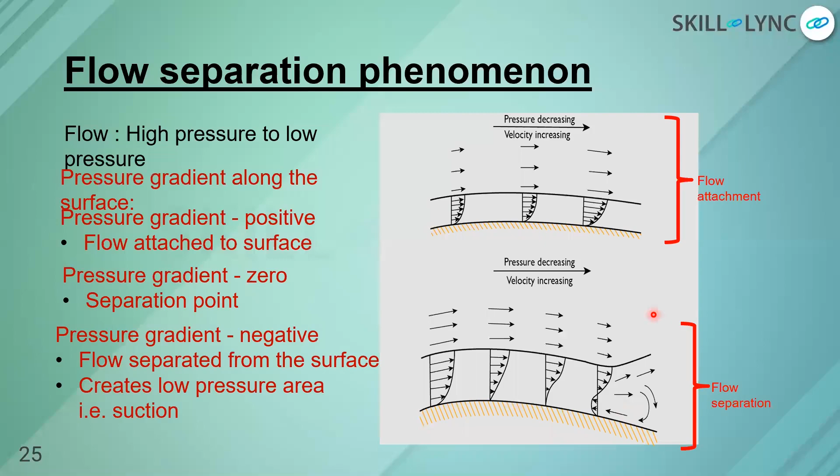So in this case, we have seen how the flow will be attached to the surface. It will not leave the surface. And in this case, the flow will start leaving the surface. So if we see the D point, which is near the surface, and C point, which is just above the surface, and the B point, which is somewhere here near the boundary, and A is the free stream over here. So we can see at the C point flow retardation is happening, and at the B point the flow is accelerating, because it has to follow the conservation law.

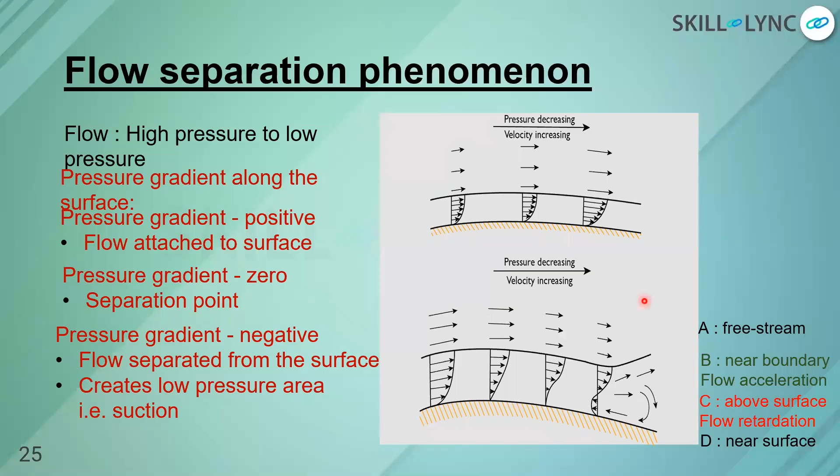In fact, Bernoulli's principle is not applicable when the flow separation is happening. So that's how the flow separation happens, because of the viscosity, because of the no slip condition, because of the change in the pressure. So let's see an example of how the flow separation happens, and how it is important in the industry or in reality.

Now here we have a wing airfoil, and by changing the angle of attack, we can see the flow separation, or the flow disturbance, happening on the rear side. Now in this case the flow separation is not happening. Now when we are changing the angle of attack, we can see at this area the flow is not attached at all. Now let me pause the video, sorry. Let me pause the video.

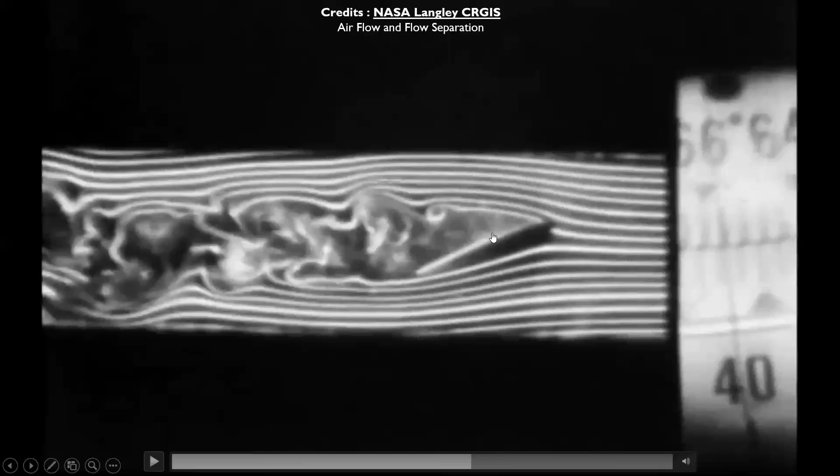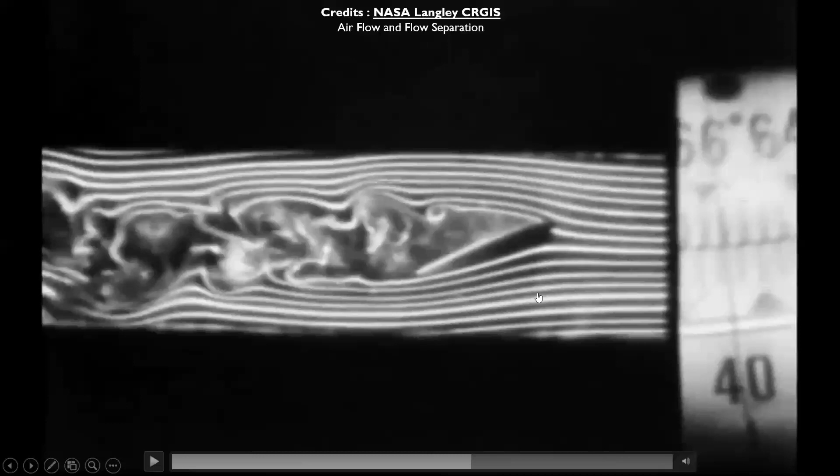Yeah, so we can see at these places the flow is attached. The flow is attached to the surface, and on the top the flow is attached to the surface. But at this area, the flow is not at all attached. That's called the flow separation from the body. And you can see the effect of flow separation, that it is creating a lot of disturbance in the flow, where we can see it is not at all stable. It is changing drastically. So let's see once more.

So we have seen how the flow separation happens when the flow is not attached to the body. But flow separation can create a lot of issues. We have seen when the airfoil was at 0 degree angle of attack, the flow was pretty much smooth. The downstream flow was very smooth, in fact. But as the angle of attack was changing, we were seeing there is a huge disturbance on the

backside of the airfoil. Now, one thing is, if any object is behind that airfoil, in the case where the airfoil has a 0-degree angle of attack, that object which is behind it might not have that much effect.

So let's try to see an example of an automobile and try to understand what is the effect of flow separation on that. So let's see, we have a car. I'm not going to explain the physics of this car, but I'll try to make you understand how flow separation is important in this car. So let's say it is running at very high speed, same as the airfoil.

So we will have a high pressure in the front of the car, stagnation pressure, because the car is moving, and the geometry of the vehicle is like that when the flow is interacting with the car, it will try to stop the car, restriction of the air. So here at the front of the car, the pressure will be maximum, and as the flow is moving along the car, the pressure will change, the velocity will change. Now I'm not telling whether it will be high or low, because I'm not interested in that.

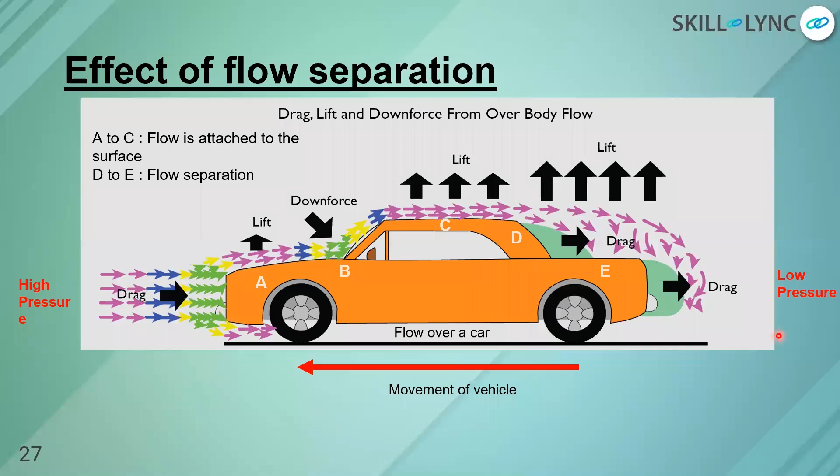The low pressure is one of the outcomes of the flow separation, but that's not my area of interest. Now, as per Bernoulli's equation, the flow should happen from high pressure to low pressure. You see there are two forces which are very much opposite. As per the principle, the flow should happen from high pressure to low pressure, so from left to right. But because the car is accelerating and burning fuel, it is creating the power, so the movement happens from right to left.

Now, when we calculate the drag force of the car, we include skin friction drag and form drag, which is called the pressure drag. This difference of pressure is going to play a major role. The more flow separation, the more low pressure area, and the more form drag or pressure drag. If we just consider the pressure at point A and at point E, the pressure at point A will always be higher.

What we can do is minimize the difference between A and E, because that is directly proportional to the fuel you're burning, and equally to the mileage or fuel economy of the car. Those things will depend on the fuel consumption, the vehicle design, which is more important, so the vehicle design should minimize flow separation, and of course the vehicle performance.

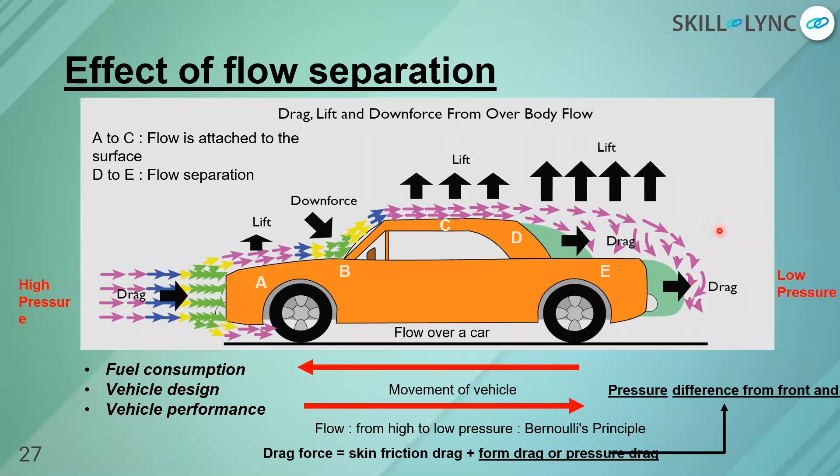So that's the reason why you see sometimes that even the sedans or the hatchbacks also, the rear windscreens are pretty much dirty if you go into a dusty place, if you go into places where the roads are not very clean, or if it is windy. That's one more thing, and that's the drawback of the flow separation of the car. It's not just the fuel consumption, but also the vehicle soiling. Okay, so that's one thing what we have seen.

Now next, let's talk about something which is called the type of flow, where we categorize. That's more important when you are trying to understand the computational simulation. Now all these things are still not related to any tool. All these things are related to the phenomena, to the physics. We haven't spoken about anything about the tool, neither ANSYS, Fluent, or anything. All what we are trying to understand is independent of tool, the physics and certain laws, or how we can understand first the fluid dynamics. Later on we can see the computational fluid dynamics.

Now I'm not going into the detail of what is laminar flow and turbulent flow, but in fact I'm more interested in what's inside the turbulent flow, how turbulent flow is very critical to handle. So I'm not talking much about the laminar flow. Laminar flow is very simple, that's low velocity flow, and the velocity vectors are quite parallel and stable, and that gives you pretty much stable results.

Now the most challenging part in computational fluid dynamics comes when you start dealing with turbulent flow. It's not like I'm saying laminar is less challenging. No, the expectations with laminar flows are well established, that this is the flow and that's how the result should be. And in a lot of experiments we have seen that we have a good correlation between the experimental and the computational domain. Now, the most complex part in the computational simulation comes when you are dealing with the turbulent flow.

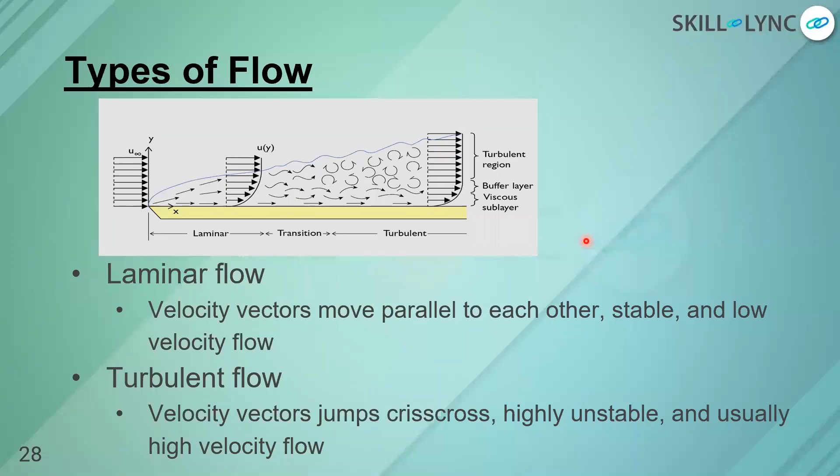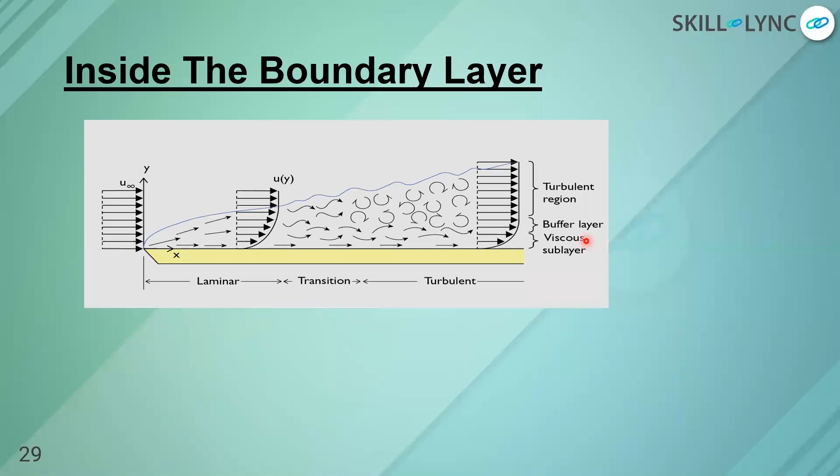Now, boundary layer. We have seen the boundary layer thickness. We have seen that it's the effect of the wall, or the effect of the roughness of the wall, up to which extent. So that's what is called the boundary layer thickness. So let's see what exactly is inside the boundary layer.

So in laminar boundary layer, we have a viscous layer, which is usually very much established, or you can say, in a disciplined fashion. But the turbulent boundary layer is divided into, as you are seeing now, the viscous sublayer, then a buffer layer, and a turbulent region. That's where all the physics, all the challenge, all the randomness, the physics change happens, and that's the place where the most challenging part occurs.

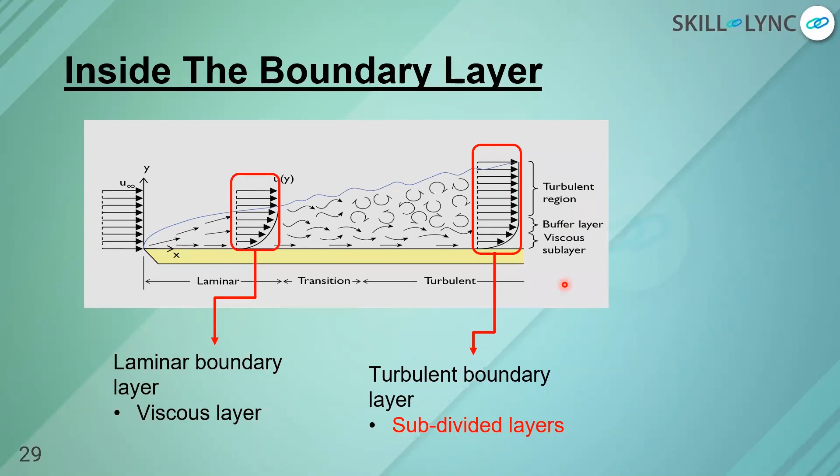Now let's see what exactly is inside the boundary layer. So if we have a wall over here, we then have a sublayer. I'm not much interested in what exactly the layer is called, but I'm trying to make you understand what exactly those layers are. Now, the fluid layer which is exactly on the wall, or very near to the wall, will have a laminar flow, because that's highly viscous flow, and the randomness will be very less. It will be very stable because it will stick to the surface. The reason behind that is it will have a maximum effect of the wall.

The wall will try to grab it, the wall will try to stop it, but because of the inertia, because of the difference in pressure, or because of the external force, the flow is moving over the wall. So here the inertia is still dominant because the fluid is able to move, but the viscous forces are dominant enough to slow it down. So that's the place where the fluctuation will be very low, and the flow will be pure laminar.

But that's the place where the shear stress would be the maximum, where the skin friction would be the maximum, where the interaction of the wall with the flow is maximum. Now, as we are moving away from the wall, there will be a region where we have a collaboration of the free stream, which is unaffected by the wall, and the effect of the wall. So it's kind of a mixed region.

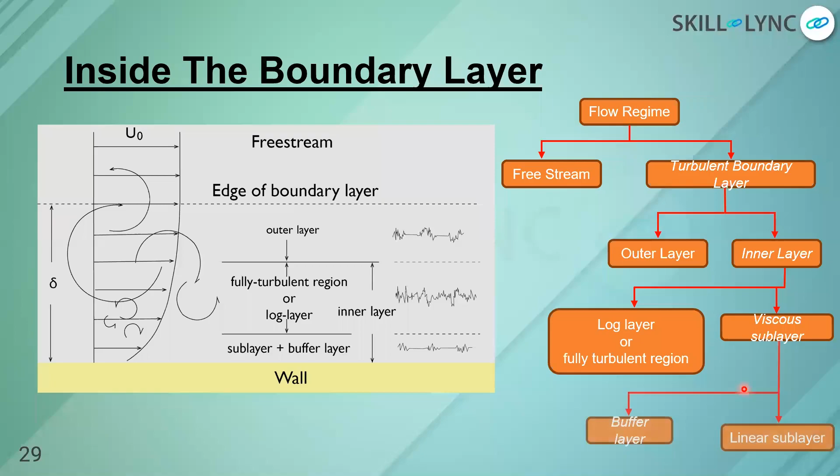So the flow regime: we have a free stream over here, and then we have a turbulent boundary layer, and then of course in the turbulent layer, again we are subdividing into all these categories. Now what's happening in fact in the turbulent boundary layer? I'm not going to read all the text.

The thing is, when we are doing the simulation, why do we need to understand all these layers or sublayers? Because when we are converting the real problem, the flow over a plate, the flow over a cylinder, the flow over a vehicle, we need to understand what kind of result we want. Remember pizza theory? What type of output you want means what type of flow region you want to resolve. Do you want to resolve this one, the log layer, the outer layer, or are you not at all interested in what's happening in the boundary layer?

Maybe I just want to see the free stream, how the interaction of fluid is happening, and I'm not at all interested in this. Now the thing is, every layer has its own significance and its correlation with the result. For example, if I want to calculate the drag coefficient of a vehicle, I will be interested in the sublayer and buffer layer. The question is why and how.

When you want to calculate the drag coefficient of a vehicle, you are interested in two things. One is pressure, the pressure drag or form drag. The second is skin friction drag. Skin friction drag is maximum at the wall, where the fluid interaction is happening with the surface, because that's the place where the friction, the viscosity and the shear stress will be high. Most important part.

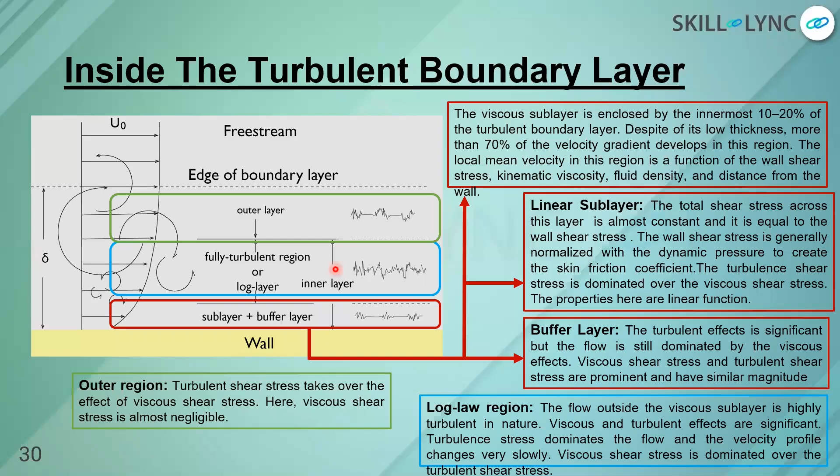That's the key point: you need to understand all these layers properly. If you want the drag coefficient of the vehicle and you're solving for the free stream, you're not going to get the correct drag coefficient. Second thing, the meshing. Let me go to the next slide. There is a parameter called y plus. I'm not going to explain y plus, but y plus is directly related to the mesh resolution and the flow regions.

So you can see over here the input parameters. Y plus is something you do hand calculations for, to get a value which is directly related to the Reynolds number. I have a slide showing the CFD process where y plus is important. If you're not aware of y plus, understand that there is one parameter called y plus when you are dealing with turbulent flow. And when I say turbulent flow, you should get the idea that turbulent flow has all these regions, and I need to know what I am solving.

So there is a parameter which has some limitations and categories: if it is in this range, I am concentrating on this region; if it is in a different range, I am concentrating on another. All these parameters are directly related to the meshing. The grid I am showing here is a structured mesh. Near the wall you have a fine mesh, and away from the wall we have a coarse mesh.

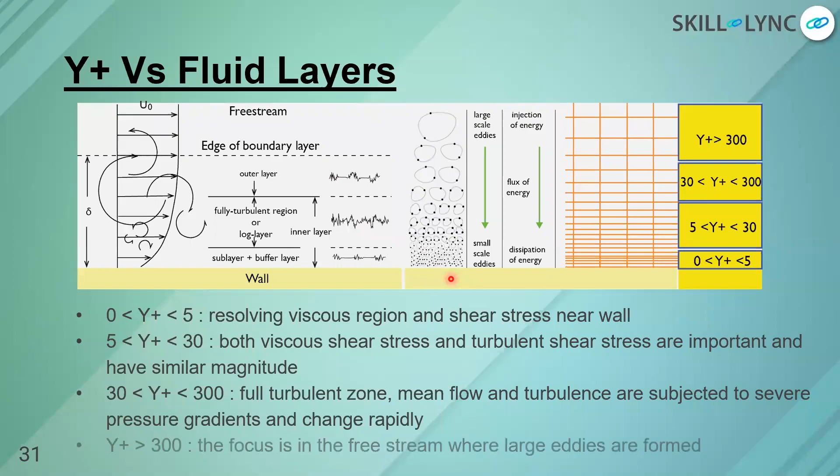It could be the heat transfer also. The heat transfer is important because that's where the heat transfer will be maximum - that's one advantage of understanding boundary layer theory. This is the place when you are mixing the flow with thermal simulation, because that's where the fluid and solid interaction happens, where the interface of solid and fluid is, so that's where the maximum heat transfer from one phase to another will be important.

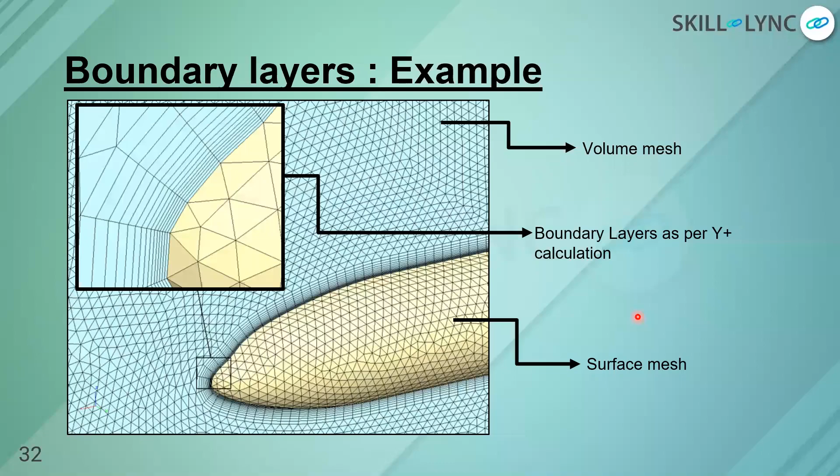So this is an example where just by seeing the boundary layers or the mesh, you can understand what type of physics we are interested in. In a lot of interviews or exams, I can give you a screenshot like this and ask what type of physics are expected - options like drag coefficient of the body, flow patterns, and so on. To understand that, we have to have an understanding of the boundary layer theory.

Now, pre-processing is something I was talking about, and I said it's not straightforward - it's not just meshing, that's really true. The pre-processing part is related to geometry preparation, and geometry preparation doesn't mean just working on the CAD tool. The first thing is you try to understand what the aim of the study is.

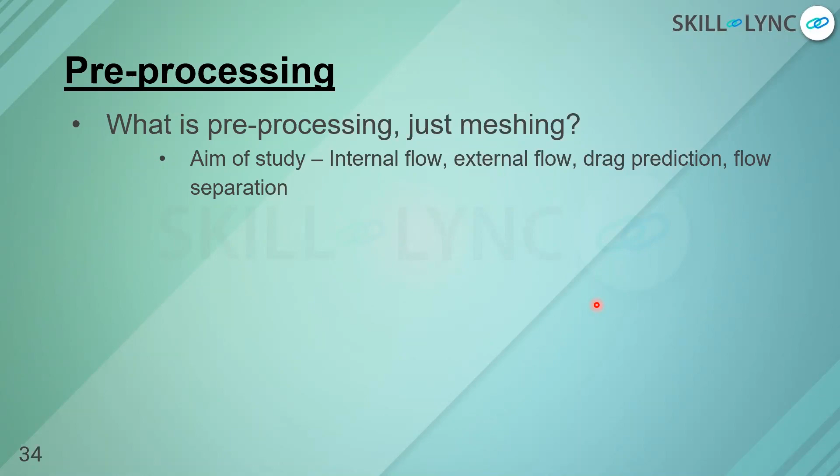Is it a pipe flow, meaning internal flow? Is it an external flow - drag prediction, flow separation? What exactly are you looking for? That's a part of pre-processing, that's an understanding of pre-processing. Now, what kind of physics is involved?

Are you interested in the drag coefficient of a vehicle? Are you interested in conjugate heat transfer modeling? This is why I keep saying pre-processing involves all these things, because you will understand which type of physics are involved.

For example, on the basis of that, if I say what type of physics is involved - say I want to do a conjugate heat transfer, or simply I want to see the heat transfer of a solid block into the fluid, with some external source of air cooling it. In total, it makes a forced convection where we have a heated block, or a block which has a high temperature. The important thing is, what do you understand from those parameters or from the physics?

Second, once you understand the physics, write down all the important parameters involved - that means the temperature difference. When there is a block, there is a solid, there is some material, there is conduction heat transfer, convection heat transfer. So the first thing is to understand all the important parameters involved, so that during simulation you don't miss any of them. If heat transfer is involved, if a solid is involved, what is the material?

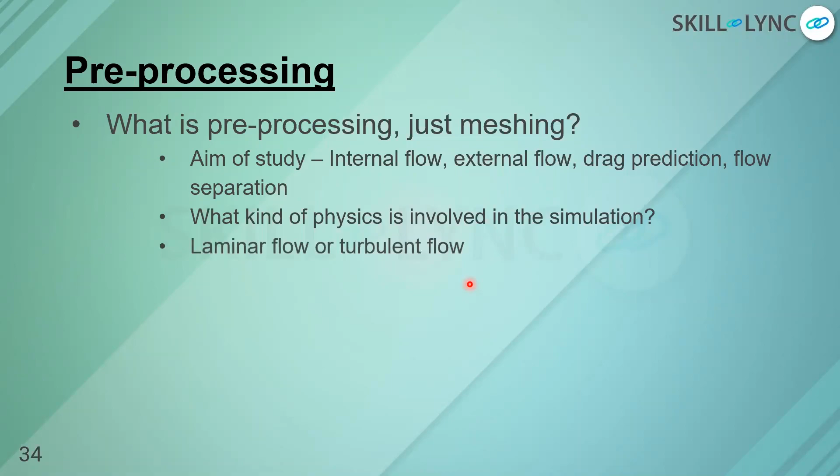Then, of course, you need to understand if the flow is laminar or turbulent, with appropriate hand calculation. Try to understand what a Reynolds number is. Reynolds number will give you understanding of whether it's a laminar or turbulent flow. If it's a turbulent flow, what is the y plus value, where you are interested, what is the physics you want to resolve or solve. So those are the parameters, that's the place.

Till this place, it is independent of any tool. This makes understanding how much you understood the problem.

Lot of places or lot of interviews, they don't ask anything if you're expert in Fluent. No, I'm not at all interested if you're good into the tool and all. Tool is a way where you can set up the problem, but only thing is, how will you know all the important parameters? How will you know which physics is important? How will you know which areas I need to focus on, which is the sensitive area?

If you're solving a problem related to conduction, and you're not considering the heat transfer, the conductivity, heat transfer coefficient, so convective heat transfer coefficient, then you might not have a good understanding of the physics. So that's the reason, till here I would say, you need to understand the physics first. Tool comes later, because tool is something where you're going to enable you, where you're going to put all these parameters. Now from here it starts.

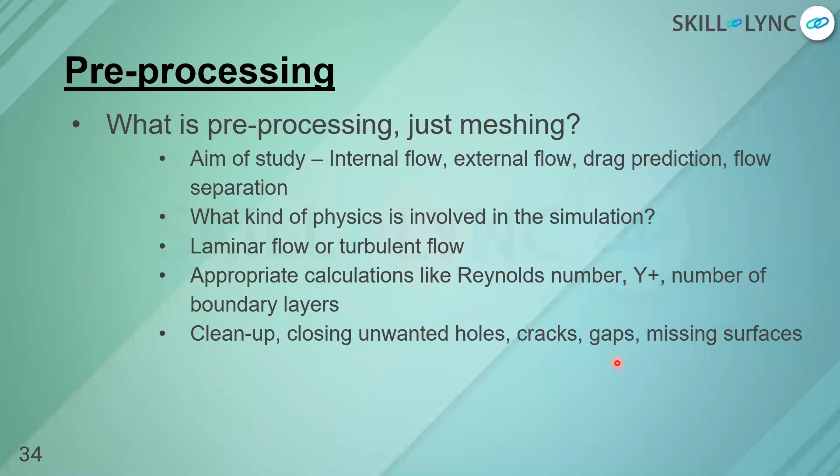Okay, clean up the CAD, close unwanted holes, cracks, gaps, missing surface, all these things, domain definition, all these things are related to capturing the geometry precisely. Those things are related to the tools, which is what you can say is a part of pre-processing, but that's after understanding the physics.

Now in the pre-processing also, something which is related to the mesh. We are not going into the detail of meshing, because that's totally different, in fact a big area. But the important part is how you're going to choose the right element size, which is also related to the physics. If you need to understand the size of element, it should not be random. There is a logic behind how you're choosing the size of element to do the meshing.

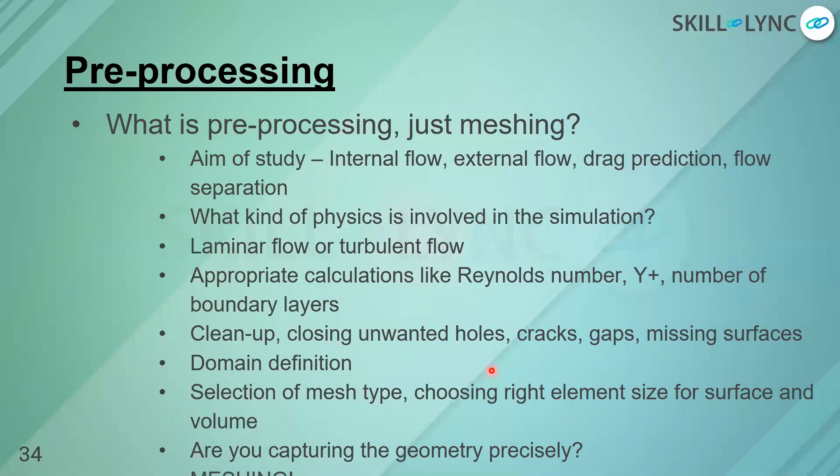Now let's take an example, I'll give you a background of why meshing is important. In fact I will not say meshing, I will try to show a process. I will try to make you understand what exactly happens in computational fluid dynamics, or exactly how the flow problems are solved.

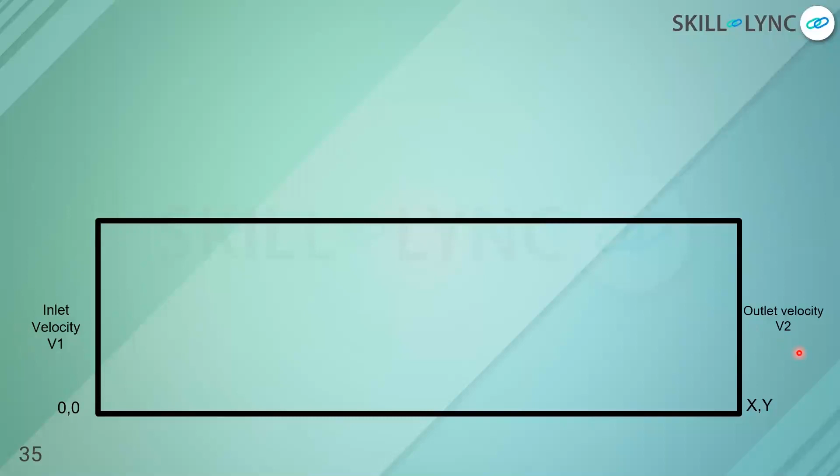So let's see, let's say if I have a domain which has a certain dimension. I'm not at all interested in what the dimension is, it has some finite dimensions. So I have an inlet velocity v1 and outlet velocity v2. Bernoulli's principle says, of course, the velocity v1 will be lower than velocity v2. Now I have a point A in the domain. I have velocity v1 at the inlet and velocity v2 at the outlet.

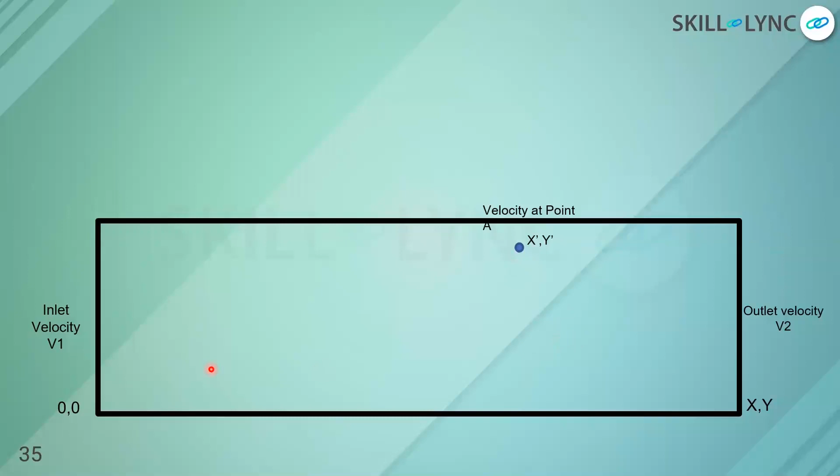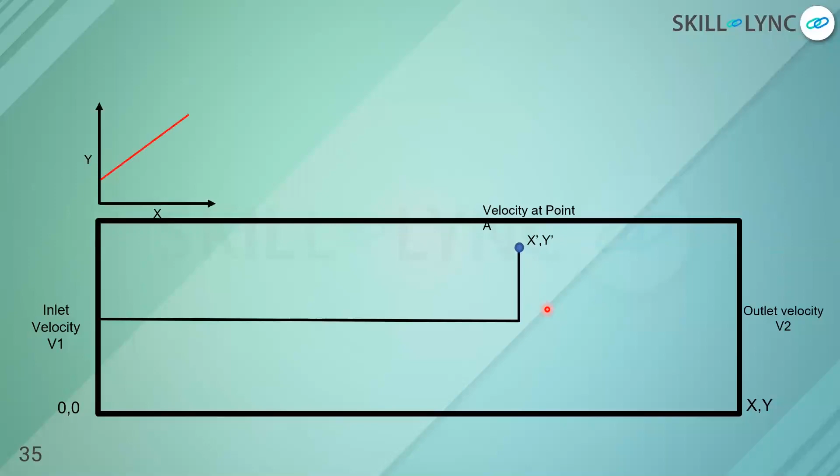So if I want to calculate, or understand what is the velocity at point A, of course this is a constant velocity, the velocity variation is constant, there is no disturbance in that. So I would say somehow I will get a result something like this at this point, maybe, I don't know, but I would say it's linear. I'm not interested whether it's different or not, but I would say at this point, from the initial at 0 to at L, where v2 will be higher. So at this point, the velocity at point A, in this situation, the velocity at point A would be linear.

Now the thing is, here we are able to understand, or we are able to do a hand calculation of velocity at point A easily. What we can do is, we can simply calculate with some correlation, with some formula. With any formula we can understand what exactly the velocity at point A is.

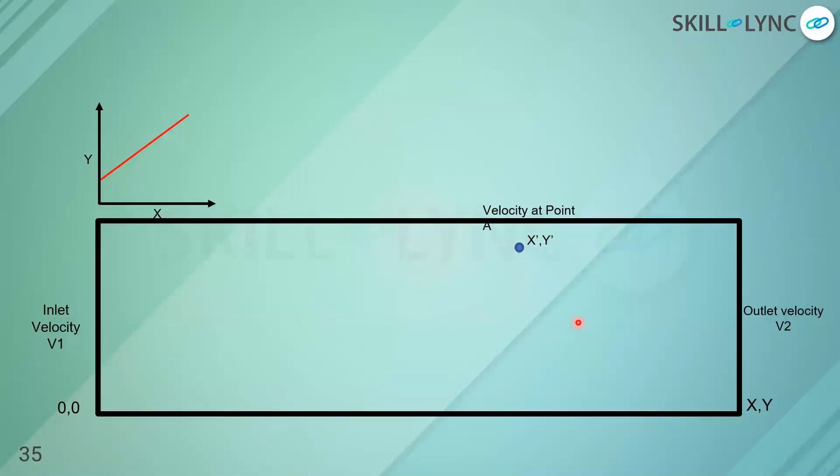But what if I insert the object in this domain, and now I want to study the difference in velocity at point A. Now what will happen is, the flow is hitting this area, so this object will create a velocity disturbance here, and it will not be linear at all.

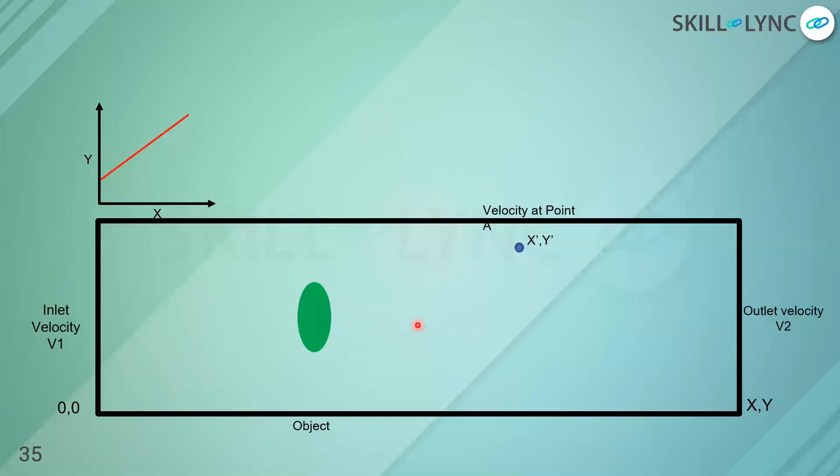That's one thing I can be sure of, because the velocity vectors at this place will not be linear, since the flow is hitting here and there will be flow disturbance behind the object. Now if I want to understand the velocity at point A, I need to calculate the velocities at points somewhere around, near these points, and then I'll be able to understand how much velocity is at point A when the object is inserted.

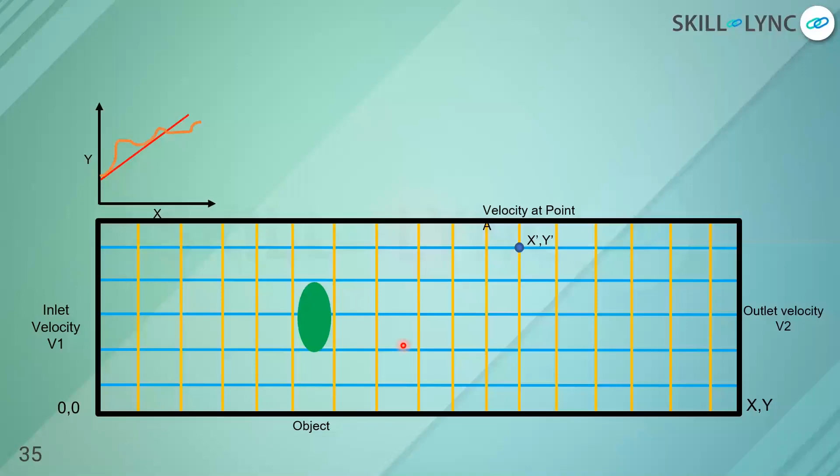In that case, maybe the velocity will come out like this. So you're not sure, because of the disturbance, how much the velocity is varying, whether it will be linear or not.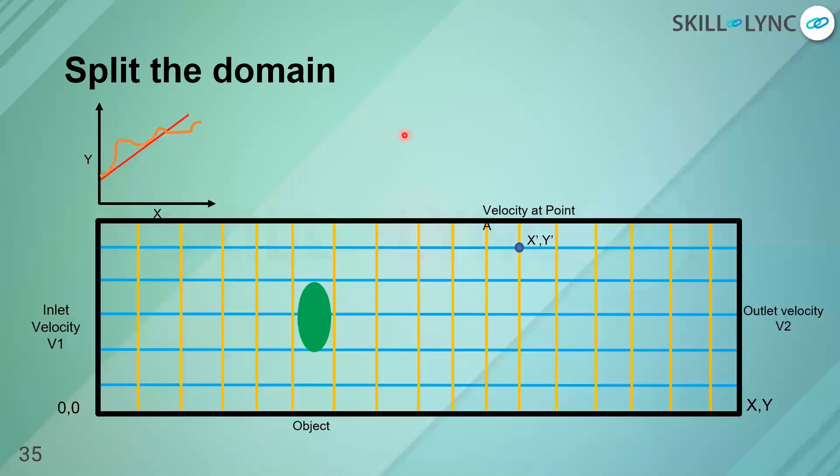Now what I did to get the velocity at point A, I split the domain. In technical terms, I discretize the domain, where we have a finite distance in the x and y direction. Now this is a finite, very small domain, so if I want to do hand calculations, I can. But what if this domain is really large? If it's really big, hand calculations are not at all possible.

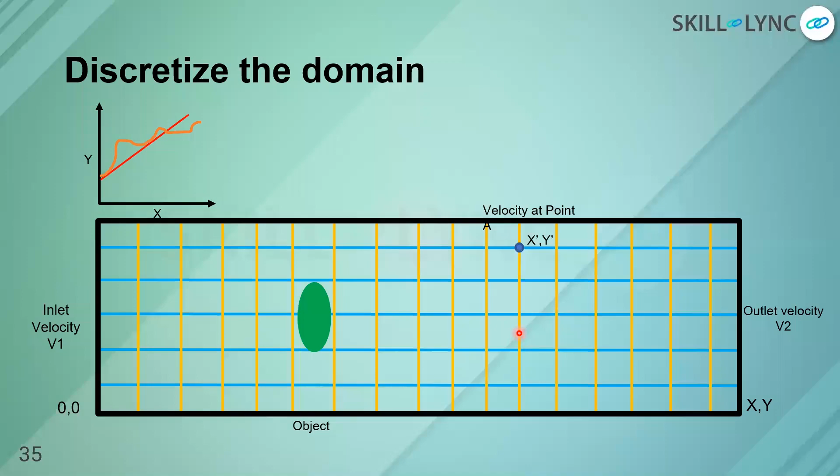So in computational dynamics, or computational fluid dynamics, we split the domain the same way, and the reason for splitting is the same: to get the velocity or any physical quantity, like flow velocity or pressure variation, at some point. So that's the background of meshing, that's the reason of meshing.

Now I did structured meshing, there are variations in meshing which we're not interested in here, but that's the reason of splitting the domain. If I want the velocity at different points, say at the middle of this square or rectangle, I need to split this further, so that the point lies on a node. That's the reason we need to do meshing, and that's the background of splitting the domain.

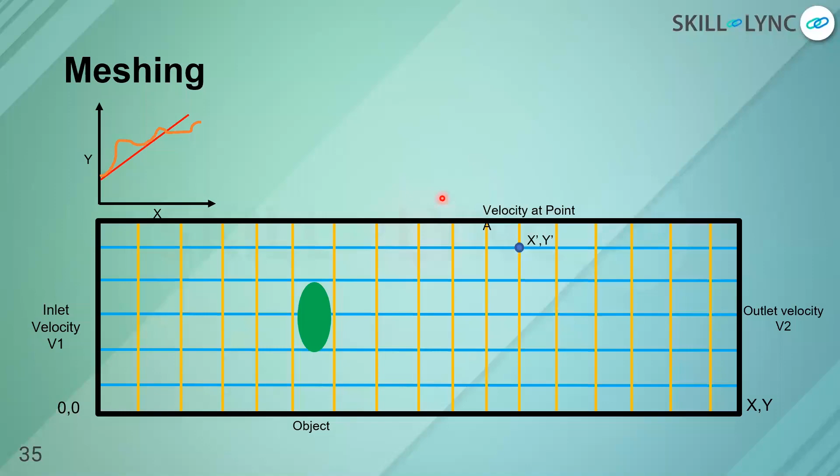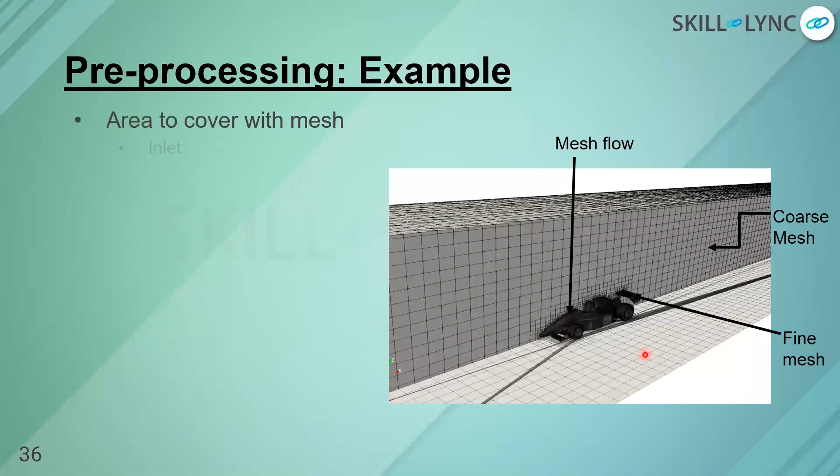Now let's take an example where we have a car, and meshing has been done on this car. The important thing during meshing is capturing all the inputs in the domain precisely, because computational fluid dynamics is simulating a body, or doing a virtual test of a finite domain.

We have to have a mesh in a finite domain, we cannot have a mesh in an infinite domain. We have to have boundaries in which we are simulating, so we define conditions like the inlet, outlet, and sidewall. That's basically the boundary conditions.

But the important part is how well we are capturing the body, that's the area of interest, not this part, not here, not here. That's the area of interest. How we capture that, and how the mesh transition happens, comes into the meshing techniques. But that's how a mesh looks like when you're going to solve a problem.

The most important parameter of pre-processing in meshing is, are you able to capture the geometry properly? Capturing geometry properly doesn't just mean capturing all the edges and curvature. It means, are you able to retain the geometry as it is after meshing, like the CAD? Any distortion or variation in the CAD happening after meshing should not happen, it should never happen.

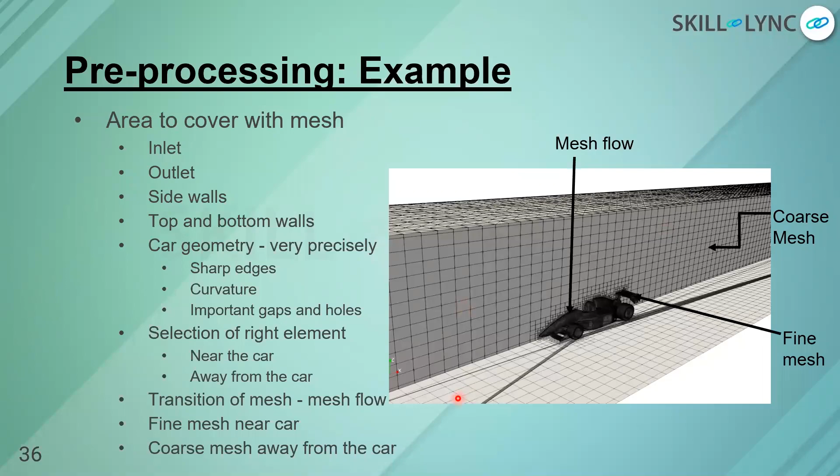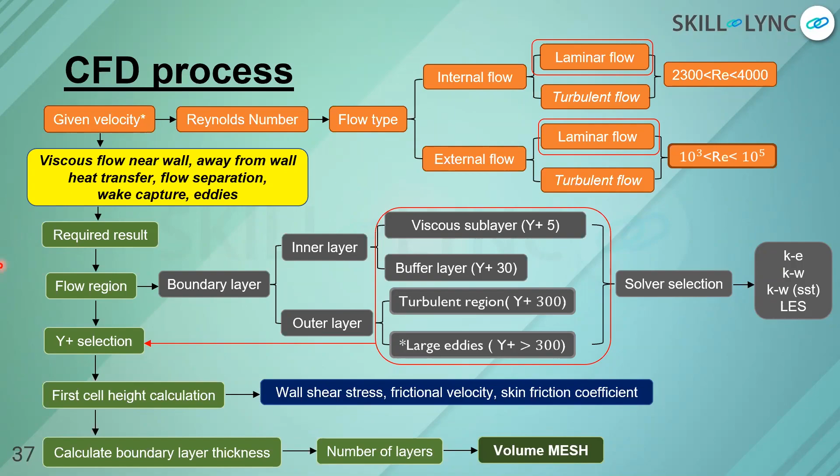The process is, what is the input you got, and what are the outputs you need based on that. So you need to do some calculation, you need to have some assumptions, you need to calculate some properties. So that's how I tried to summarize the CFD process. With this you are good to go, but still each and every block you should be able to understand properly. Now, what we talked about CFD was the background. The important part is how we are going to utilize the skills of our understanding towards computational fluid dynamics. Now here, I have one more slide for the result discussion, so let's talk about the results.

This is the simulation of the u velocity magnitude, which has been cut at the center of the body. Now you see all the cursors, they are indicating the flow under the body. We have sedan 1, sedan 2, and then a performance car, which you can say is a sports car. And then we have an SUV, and then a truck. Now one thing we see is the geometry variations past the B pillar; the back geometry of these cars is different. So of course we can expect a change in the flow behavior. The second thing is the ground clearance. The SUV and crew cab truck have a high ground clearance, and we see how this velocity variation is happening.

Now the significance of these results, or how we are going to use them. The underbody flow in the automobile is very important, for two reasons. One is the drag coefficient, because in the underbody of automobiles all the parts are exposed to the air, and they are very irregular in shape. The axle is open, the suspension, the exhaust is there. But again, are you trying to understand the flow physics, or the heat transfer? Because if there is exhaust geometry on the body, there's heat transfer. Do you want to cool down those parts, or are you only interested in the aero part?

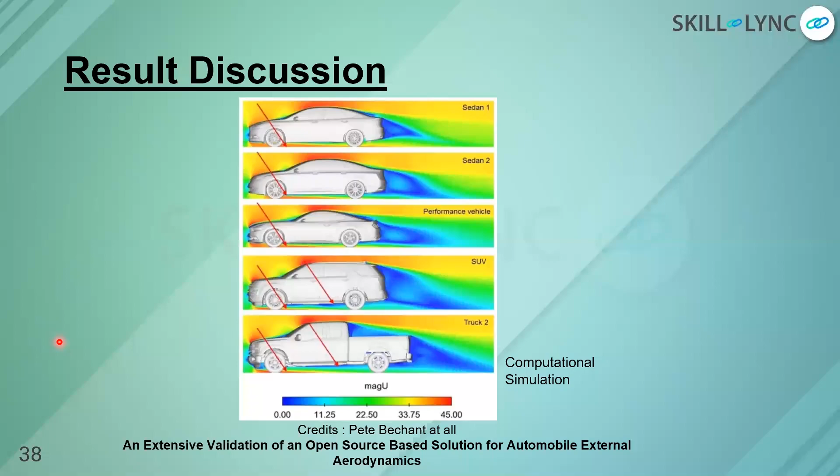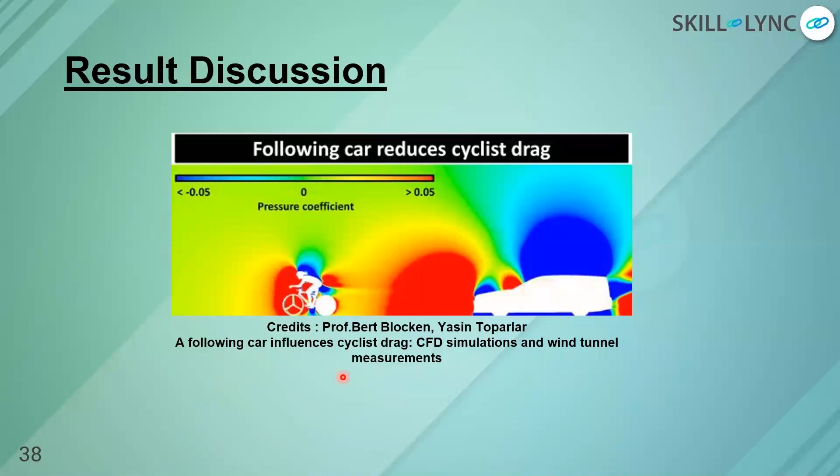we achieved a drag coefficient improvement of 0.5%, which was a very big achievement, at least when we were trying a lot of things and were not able to achieve it. 0.5 is really small, but when you're calculating the drag, when doing studies, that 0.5% is very big for the improvement.

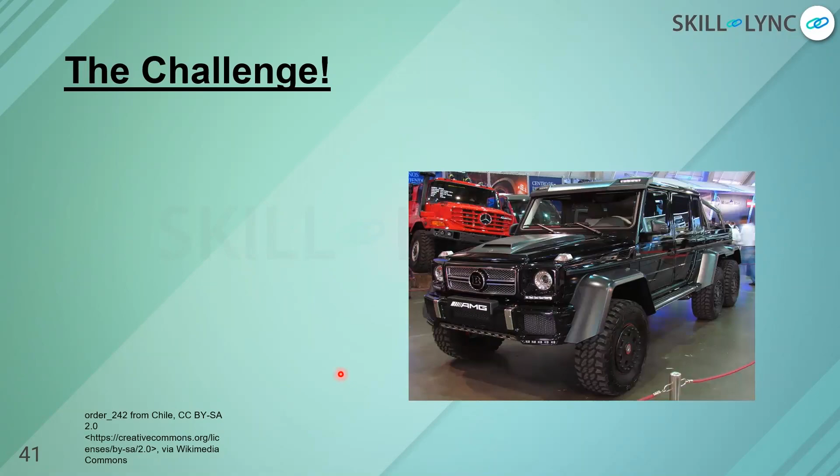Now let's see module 3, where we'll be talking about the challenges in CFD. What are the challenges? Let's talk about the automobile, and there are different fields. When I was dealing with aerothermal simulations, you have to establish everything very carefully. You have to have a good aerodynamic design for less fuel consumption, and you have to have a good flow around the car, in fact the underbody, so that any parts near the exhaust should not get heated up.

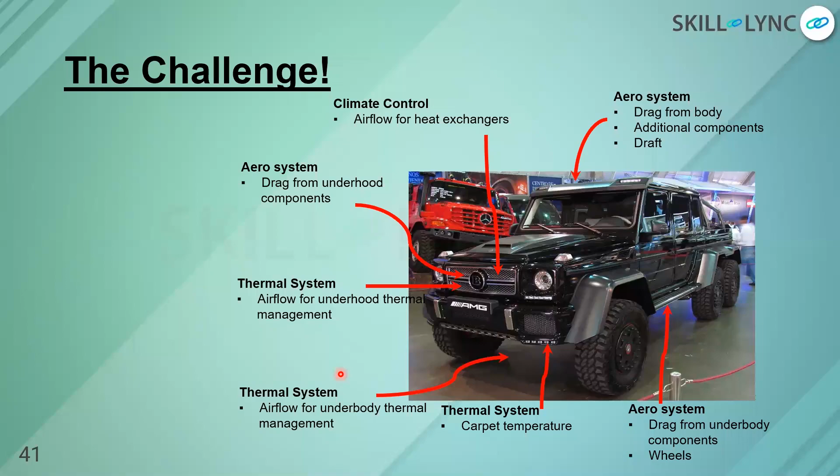So it's a fight between flow and thermal, where you want minimum flow so that the drag should be less, but you want maximum flow so that the cooling should happen. So it's like two opposite forces where you have to make a combination where both are good. Dealing with those factors where one is not independent of the other is really challenging, where you are seeing the impacts.

Let's take an example: a good aerodynamic design will directly correlate with wind noise, because the air is interacting with the truck. So of course the friction or the flow separation will create noise also. Then vibrations: if the flow separation is too much, that can cause vibration also. Crosswind, fuel consumption, headlight cooling, stability, and more. So these are places where you can see it's not straightforward when you're actually going for product development.

If we think aerodynamics is simply making a sleek design, no, not at all. It's much more complex. If you want to understand how complex it is, try to reduce the drag coefficient of a vehicle from the underhood. We have the engine, we have a lot of parts, and even if you're able to achieve 1%, that's really great. 10% is huge.

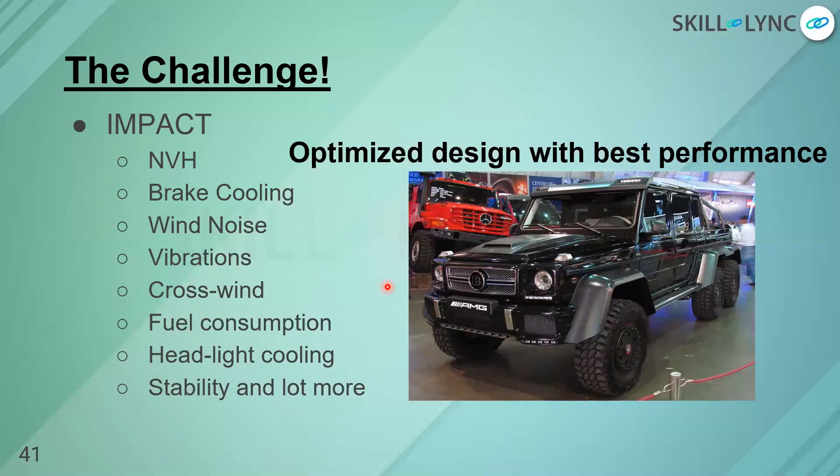Aerodynamics doesn't just deal with the aesthetics of the vehicle. It's not just the look of the vehicle. Yes, of course, the most important part is an optimized design for the best performance, but it's not that simple. In vehicle development, the fuel consumption, all the parts should be working properly and in the cooled range. They should not heat up, because heating any part can cause damage, a short circuit, or even a fire.

So dealing with all those things in development, or if we just talk about computational fluid dynamics, managing the balance between the thermal and the flow is not that easy. Especially for underhood cooling, it's not that easy. Thermal management of a vehicle is not that easy.

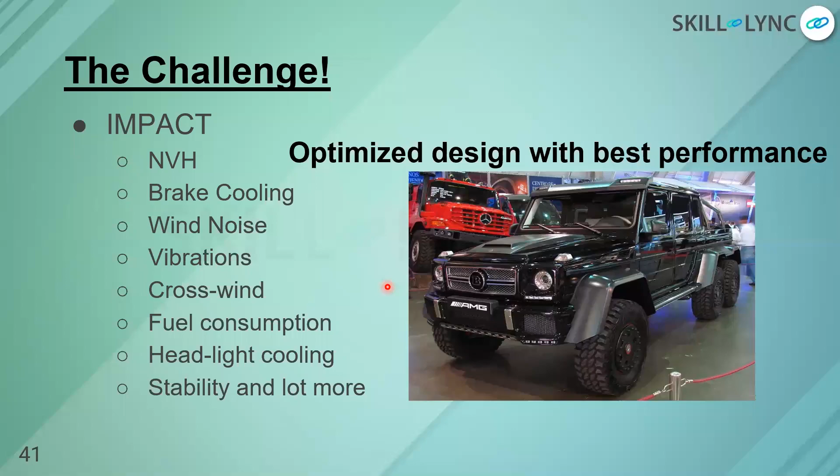So what we get is the optimized design, where everyone is, not very happy, but okay, I'm happy with this, because I need to take care of my neighbor also, so that he doesn't get upset. He is happy, I'm happy, both are in the safe range, the vehicle performance is good. That's the aim of the development. Okay, now the challenges in CFD: we are seeing that product development time has changed.

If you see the industries and the competition, most of the industries nowadays compromise on cost, time, and resolved physics. That's how we see it, because of a lot of assumptions. So for the challenges in CFD, what can be done is to speed up the process, where you don't have to wait much for the results.

I remember when I run one vehicle simulation, it takes 18 to 20 hours for a full vehicle, which is really high. Still, 18 to 20 hours is really high. So till that time, I need to understand what type of physics, or if something goes wrong, again I need to spend the 20 hours. With an automation process, if something is wrong, why can't we just do the update on that? Why do we need to run the whole simulation again? That's the one thing I am really interested in.

The real physics, again, is far more complex and unpredictable. We have been talking about this almost since the start. So why can't we get the exact solution? In fact, there is a method which is called direct numerical simulation. What we see here is DNS and RANS. I did not give any introduction to these things, because they are way more complex, and they're basically the schemes, or the solver settings, solvers.

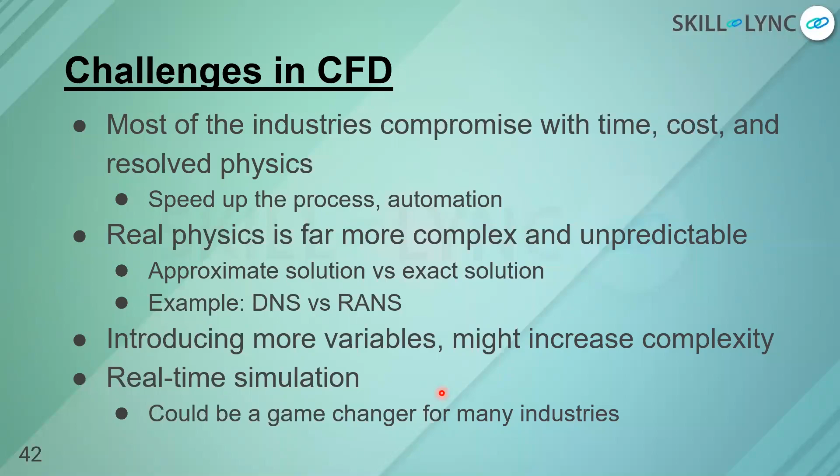If any industry can make it so you just bring your tablet, bring your system, and you can see how the flow is happening, that will be a great achievement for computational fluid dynamics. But it's not as simple as we see in the movies, in sci-fi or fantasy movies. It's not that simple. It's much more complex than we think.

Now, what type of jobs or opportunities can you look for if you have a CFD skill, if you do a course, if you do a degree? The first and most important part is meshing. I'm not including CAD because that's the designing part; you're not dealing with CAD when you're a CFD engineer. With a CFD profile, you directly start with the meshing. That's the most basic job profile, where, as per the domain, you'll get the geometries you need to pre-process, and you need to set up the case. That's one part.

Full-fledged could be your work as an application engineer, where you are domain specific. Like, I am dealing with the automotive industry. So I don't do the meshing. I deal with the simulations. I see the results, try to understand the reports, and recommend the results.

Another thing is, if you are interested in the development part, if you have a good grip on coding, you can work on the GUI also. Maybe solver development, post-processing development, so testing, validation, and development of the tool is also involved. In research, there are basically two types. You're doing research on the CFD solver, existing methods or new methods, or you're taking CFD as a tool and doing research on a product.

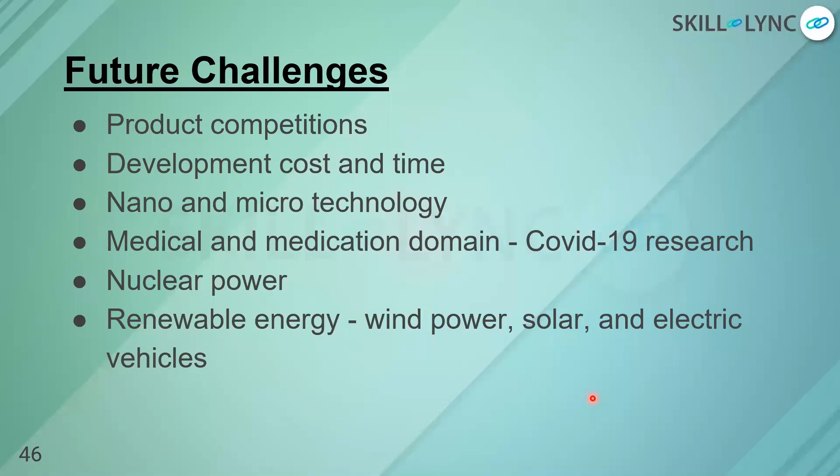And of course, computational fluid dynamics is an industry which is very narrow. In fact, very, very narrow. It's not easy to get the right job, because the computational cost is high, and for the physics you're dealing with, you need to be an expert. It's not just about pre-processing and solving the equations. There is a lot of research you need to understand, predict the results, and do out-of-the-box thinking.

And overall, it's a good decision to take this course because it will make you different. But the thing is, how are you going to make yourself different? That is to understand everything properly: the physics, and the tool inside out, what is expected. That way you can make a career, maybe in the research field, maybe as an application engineer, maybe as a developer.